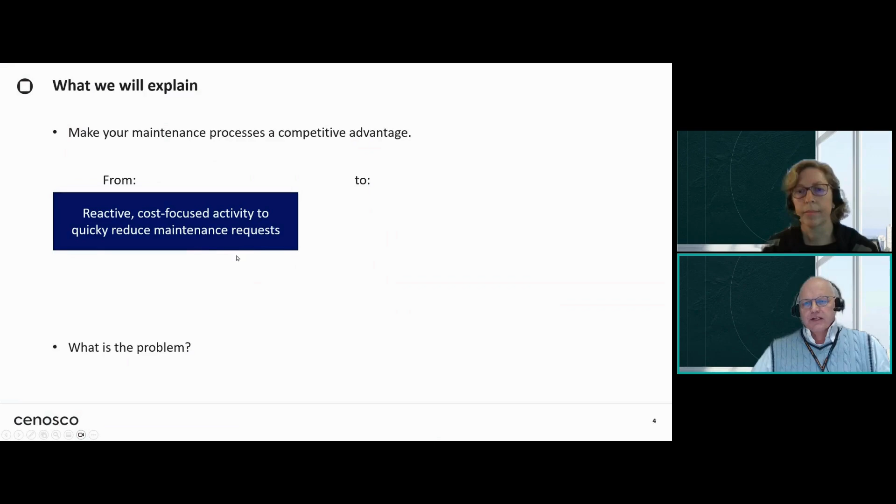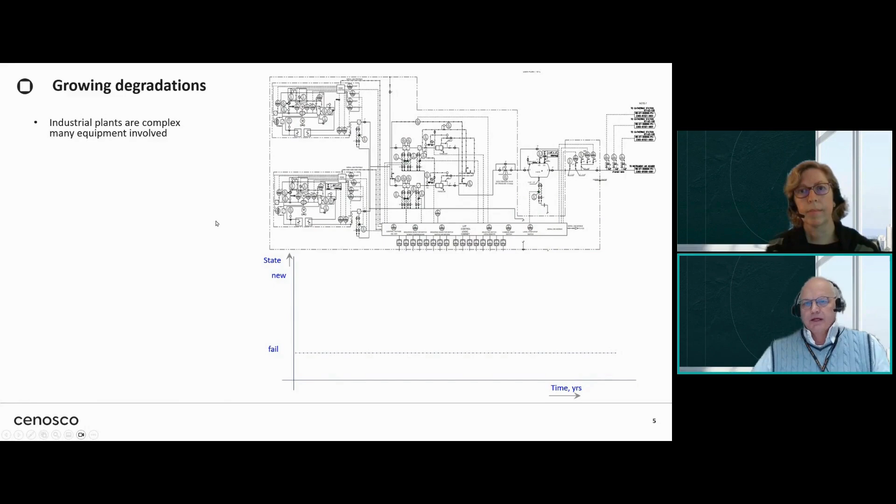So the question is, how to move from, say, a reactive cost-focused activity for maintenance more into a proactive value-adding activity, and how to do that. What is actually the problem here? The problem is often if we build a plant, then in first instance, we're just interested to make product. And so we have typically a maintenance and operational department. But these installations can be quite complex, and there's a lot of equipment involved. And this equipment starts to degrade from the start.

And some degradations go typically slowly and maybe linear in time, but some go non-linear in time, some go faster, some go typically in an undulating way where, dependent on the operational conditions, sometimes the degradation goes a bit faster and then slower, etc. So now the question is, with all this equipment degrading and all these maintenance requests popping up, how to deal with this? Because after some time we see that the maintenance department can get overworked and typically operations is unhappy. How to deal with that?

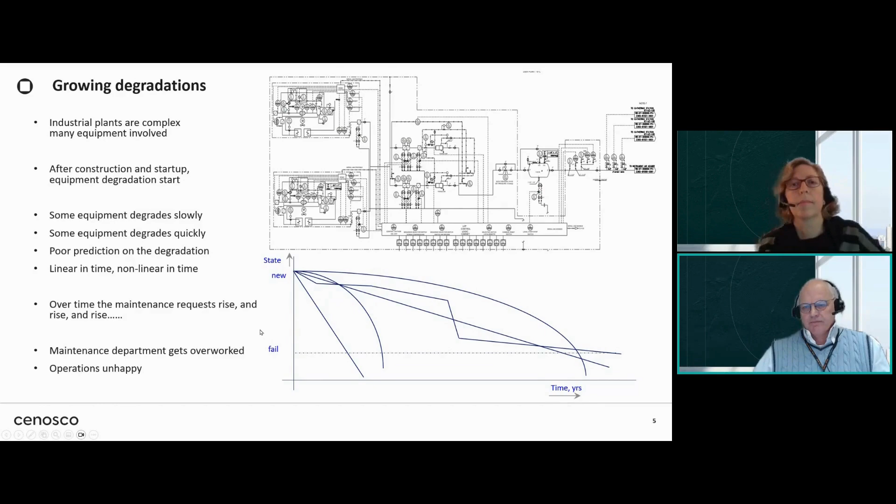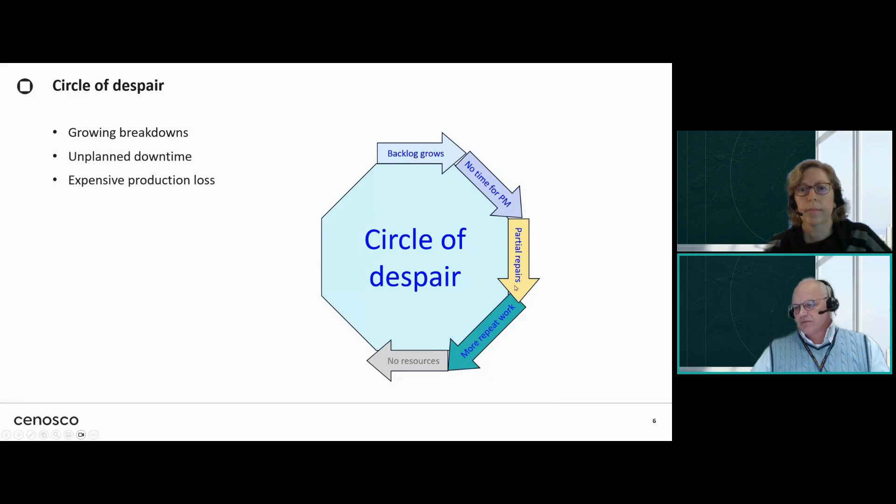Yeah, we call this sometimes also the circle of despair. And in this circle of despair, we see that the backlog is growing. We have no time for preventive maintenance. We see we have partial repairs. We get more repeat work. We do selective repairs. We get budget cuts, and the morale drops. So how to deal with that and how to step out of this? You can wonder, in this logic, who's active in reliability, who owns reliability, and who's actually managing the reliability.

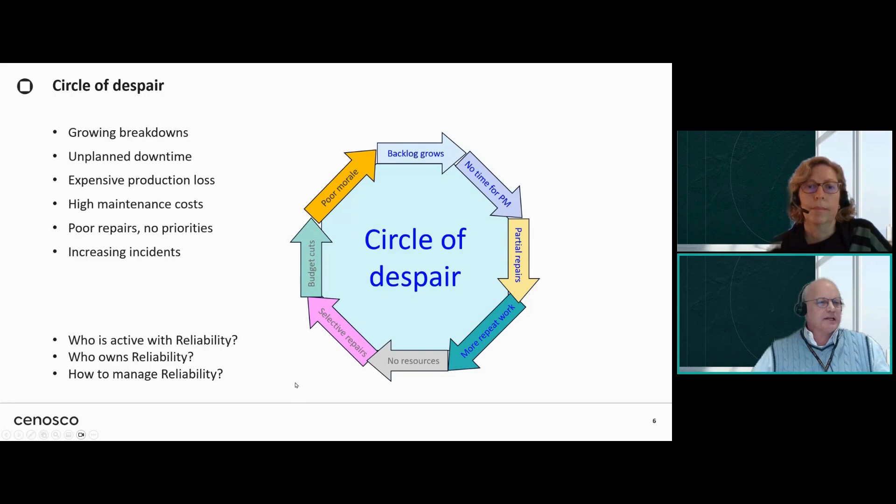Here's an overview of some maintenance history for 4 years. We did this analysis and made this more or less Pareto diagram, and there was one piece of equipment that actually had 80 failures over the 4 years.

I show you this graph because this helps to get a bit of focus. Where should you start? You may start, of course, with which equipment has high priority repairs and multiple repairs over time. And you may realize from this graph you should focus on this end and not on this end. So if you focus on this end, you will start to bring a bit of peace in your operations. You expect that certain breakdowns will not occur anymore, or maybe later, and you start to get a bit of grip and power over your degradations.

One of the reasons I show this graph is that, if your program of reliability improvement is effective, after some time you may have addressed this peak here, and then you need to address the next one for the next year. So after a few years, if you do this maintenance history analysis again, you expect this to go down, and later on to go down even further. And this may help you to focus on the high priorities and the repeat repairs to free up some resources and to improve your reliability.

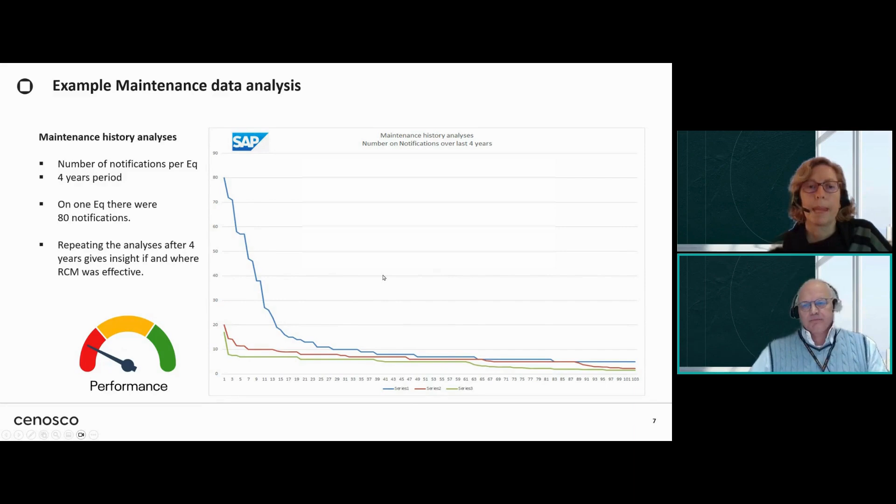So you may wonder, how does this connect to RCM? In RCM, we are interested in what caused the equipment to fail. What are actually the ways it can fail? We call that failure modes. And when we know these failure modes, what can we do to prevent or predict the degradation, take action, and actually get our performance up?

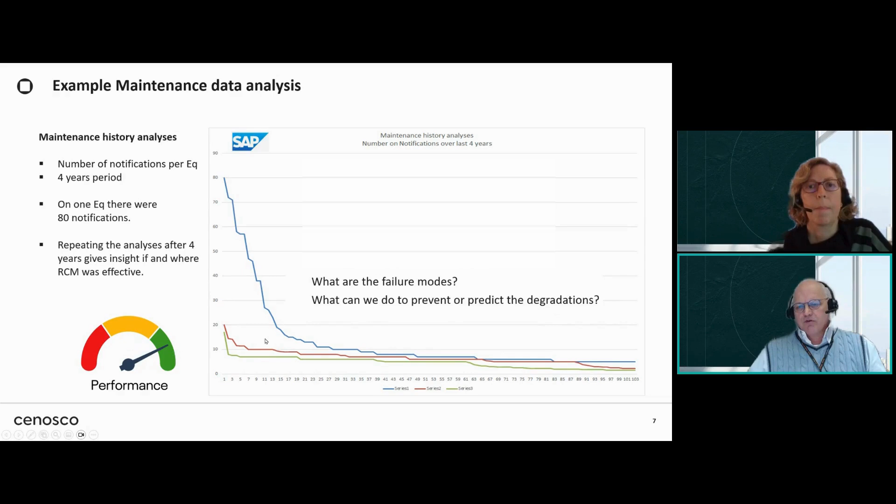A part of the maintenance of that installation is managed under what we call asset management. And in asset management, we can describe a few processes. This can be very detailed, so here I just want to keep it simple. The main objectives of our asset management are that we want to reduce our business risk, we want to increase our revenues, make more money, but at the same time, we want to reduce our cost. And then we're interested in how to balance these three and come to a balanced approach.

So in asset management, we typically start off with what we call the executing processes to maintain the plant, which is typically in the area of maintenance execution and turnaround. And there's often a managerial process to oversee that, to have a look at risk and to intervene there. On the turnaround and maintenance execution process, we also see that SAP is involved to hold those objects in, for instance, notifications and work orders. Then we can measure our performance, but if our performance is poor, our manager gets angry. And from the angry manager, we actually end up in what we call analyzing processes.

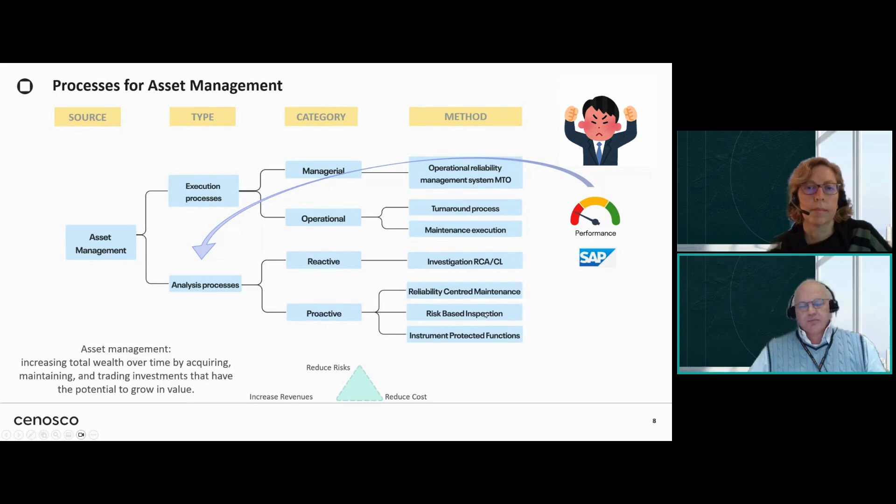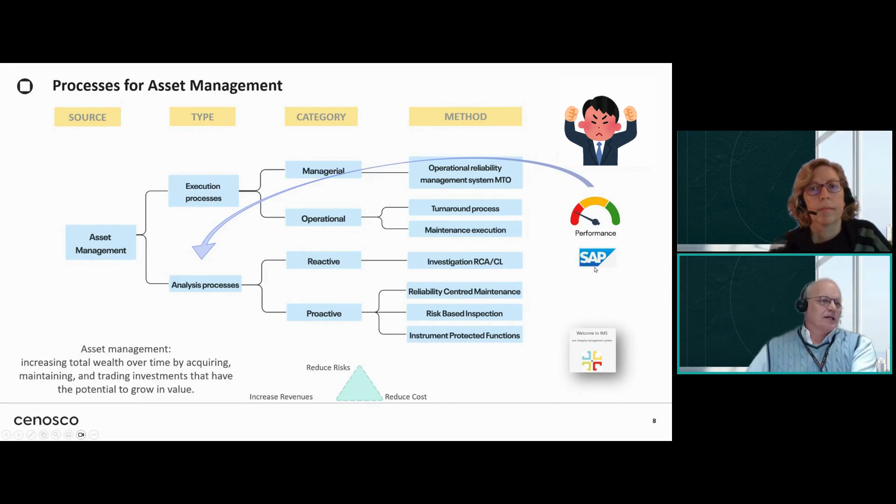The analyzing processes can be done in a reactive way: something went wrong, what to do with it, and we do an investigation, sometimes called root cause analysis or nowadays causal learning. But it can also be done in a proactive way to take action before the next failures come. And here we see that the processes of reliability-centered maintenance, risk-based inspection, or instrument protected functions come in. RCM is related to reliability, risk-based inspection to integrity of mechanical equipment, and instrument protected functions to safeguarding instrument systems. And here we see that the tool that we own, the IMS tool, holds this area. So this picture also gives a bit of an idea of what is taken care of in SAP and what should be taken care of in IMS.

If you think of what kind of functions can go wrong, then we have a list here of the typical functional aspects of a plant. One of the things you might want to start with is: what is the production reference plan? What are my targets? Do I meet my targets? And do I measure my performance against the target? One of the first things you should do is make sure you measure your performance. And from that performance, you should see what your gap is. From here, we can check out license to operate aspects, how to deal with product storage capacity, do we have storage there, how to maintain that, and know the phases in the production process.

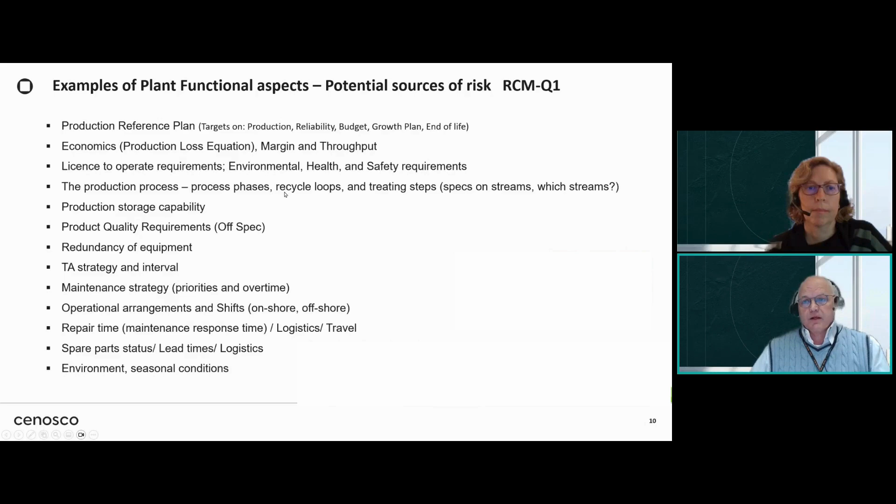Why do we do that? Well, we typically follow in RCM the 7 questions of RCM. These 7 questions seem simple and rigid on one side, but they are actually a very good guide to what we're looking for. Often we see in maintenance that we may overlook the first two questions: What are the functions and performance standards of the asset or the unit? In what way can it fail to fulfill those functions? And actually, these first two are an indication of where our risks are and how to deal with those risks.

From there, the RCM questions help us to say what can cause those failures. But one of the most important questions in RCM is question 4: what happens when each failure occurs? And this is actually a question where you are forced to understand how your equipment degrades and how it may fail and what is the failed state.

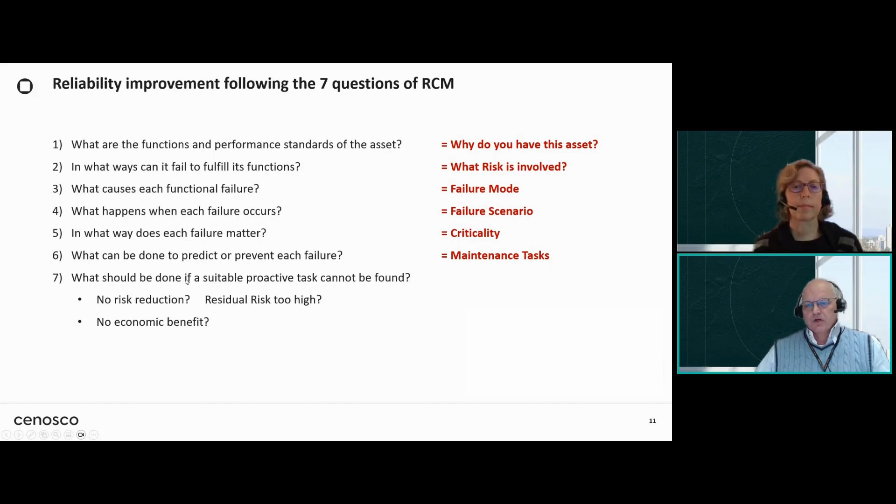And from there, you can then say, hey, what can we do to keep that in good shape? And if you do those tasks, is there enough risk reduction? Is there economic benefit with the task we have? And if there's not enough risk reduction or economic benefit, what can we do to get an alternative there?

If we look at the cost effectiveness of maintenance, we see that if we do more maintenance, then we actually spend more money, and we expect, of course, that the cost of non-availability goes down. And then we end up in an area that we call risk-based, where we look for an optimum. If we don't do enough maintenance, we are under-maintained, and if we do too much maintenance, we are over-maintained.

But you can wonder, what is a risk-based approach? Well, the point of a risk-based approach is actually that you want to make an estimate of the risk if you do nothing, and the amount of risk if you do nothing is actually a measure of how much resource you have to do something.

So if you look at the risk-based approach, you actually see that we compare two situations. First, we do no maintenance and then check what is the risk level. Then we do the maintenance activity, and then we're interested, is there any residual risk? So if there's high risk, we do high maintenance. If there's low risk, we do low maintenance.

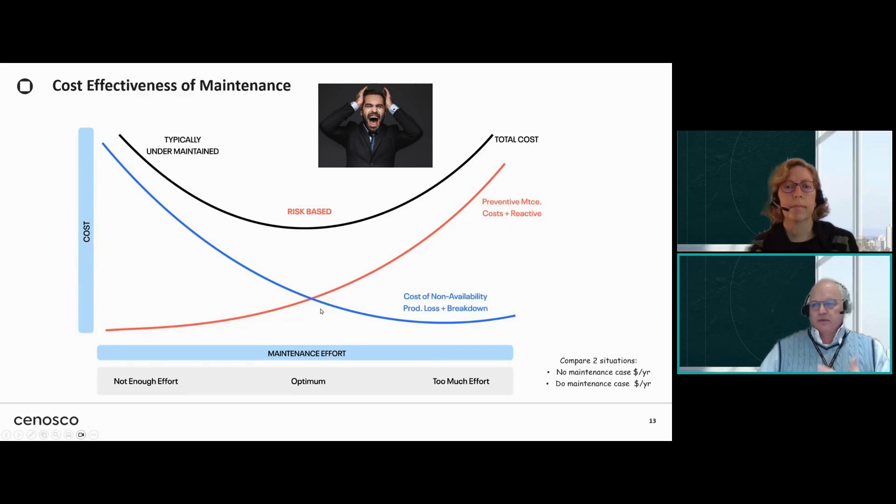If we look at failure modes, actually a failure mode is a way in which an equipment can fail. And we follow the failure modes according to the definition of Mr. John Moubray. And John Moubray, who wrote a very interesting book on RCM, said actually a failure mode is a concatenation of two words, an item and a failure description, or a noun and a verb.

For example, if you look at bearing failure, is that a good failure mode? Well, it's a good item, the bearing, you can hold it, but failure is a bit vague. Actually, you could say, hey, I would like to look at how can a bearing degrade? And you could ask, what's the function of the bearing? Well, it's to keep the shaft in place, but also allow a low friction rotational movement.

So from there, what can go wrong? Well, you can get clearance on your bearing and you don't keep the shaft in place. So you get bearing wear. But the bearing wear can be driven if the lubrication is not good enough. So this can be driven by what we call lubrication failure.

So if we take an example of a simple centrifugal overhung pump with two bearings here, we can wonder, in this situation, how would bearing failure be driven? Well, this could be by low oil level. And now, if we look at these aspects, bearing wear and low oil level, we can actually wonder, how can we determine that this is occurring? And this comes back to question 4 of RCM. What happens when the failure occurs?

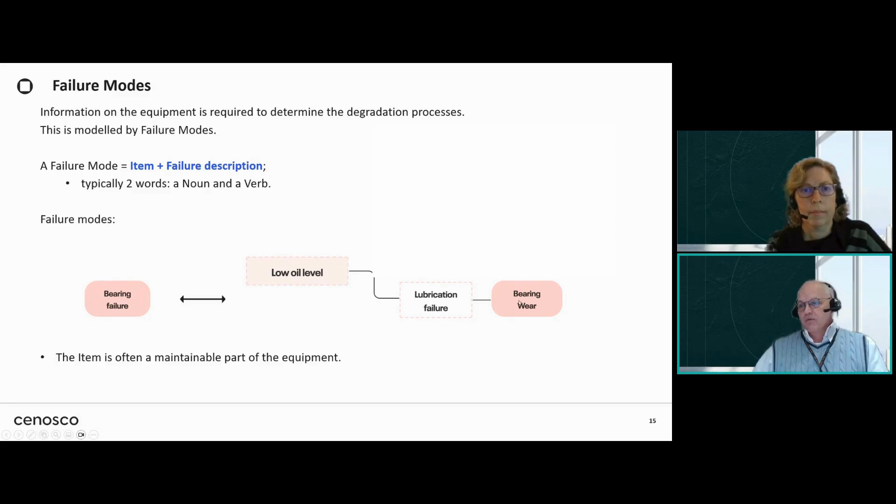So here, how would we determine bearing wear? Well, we got too much clearance and we may get vibration. Low oil level, how can we detect that? Well, we might have a sight glass and we can look at it. So what I'm trying to do is I'm trying to look at these aspects and how can we connect it to a technical argument.

But it also can have oil degradation. Well, what is degraded oil? Well, it may not look like apple juice anymore, but something like this. This is typically old oil, not so good. Of course, there can also be particles in it or water, but actually it is losing its lubricating.

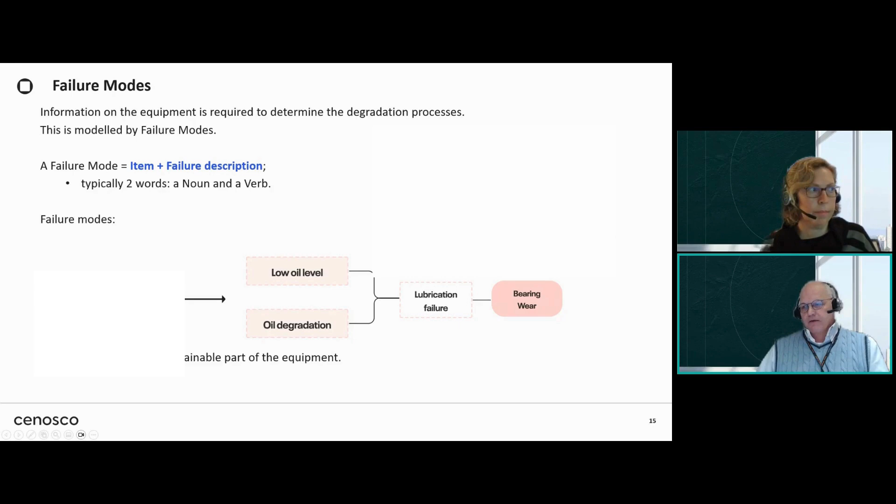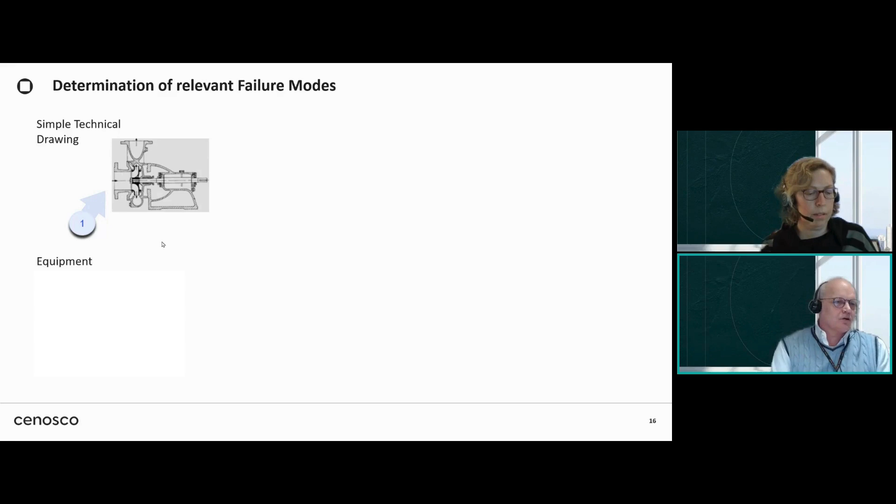Then you can wonder, if I have a piece of equipment, which failure modes can occur here? How to determine the failure modes? Well, if you want to determine the failure modes of a piece of equipment, I would recommend you first take a look at the picture of the equipment. What does it look like? Take a look at a cross-sectional drawing. What is internally there? What are wearable parts? What are parts that can corrode, erode, maybe foul up, etc.?

And from there, you can wonder, do I have some maintenance history on this, or do I have a maintenance manual? In the maintenance manual, there's often a list of spare parts that are recommended, and this is what we call a recommended spare part list. And you can see it coming that a failure mode, which is a part with a failure descriptor, may be listed in the recommended spare part list of the vendor.

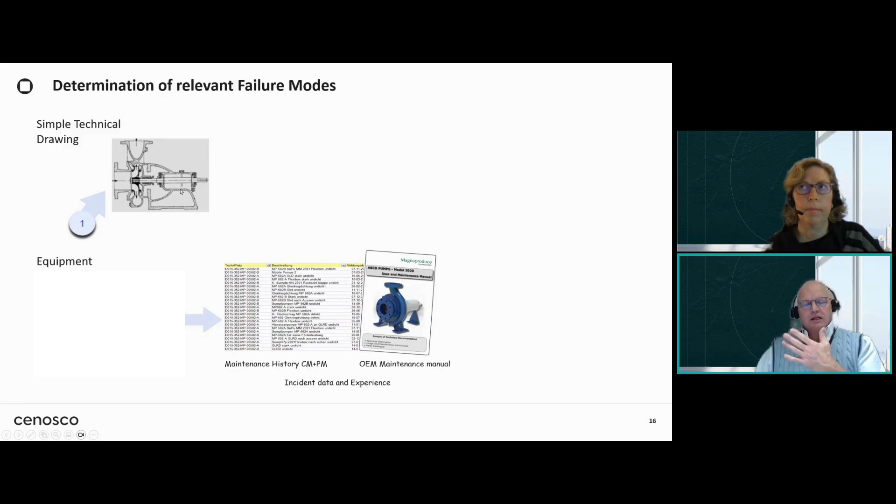So the recommended spare part list of a vendor can help you to say, what of these spare parts may degrade? What do I expect? What is the consumption? And from there, what may be the failure modes that can occur on my equipment? And based on the buildup and those degradations and failure modes, you can wonder, how would that then lead to a failure of the equipment?

And there you should look in the P&ID and check out where the pump is in the P&ID. In this situation, you see there's an A and a B pump. And this also helps to say, what are the products that go through that pump? What are the temperatures and maybe the composition of that product? But also what will happen if the equipment fails, and which failure modes are more important and less important.

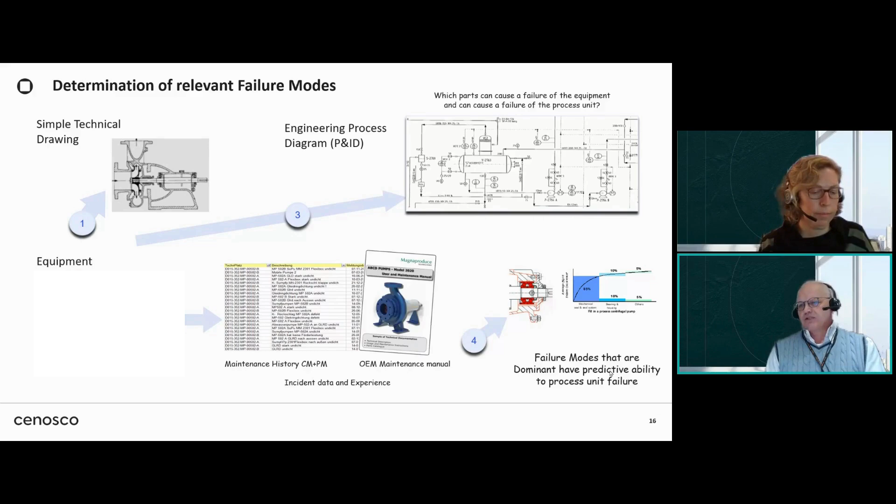And from here, we can make a list of the failure modes. And we may say, let's focus on the dominant failure modes. These are the failure modes that most regularly occur. And what maintenance can we do to avoid those dominant failure modes?

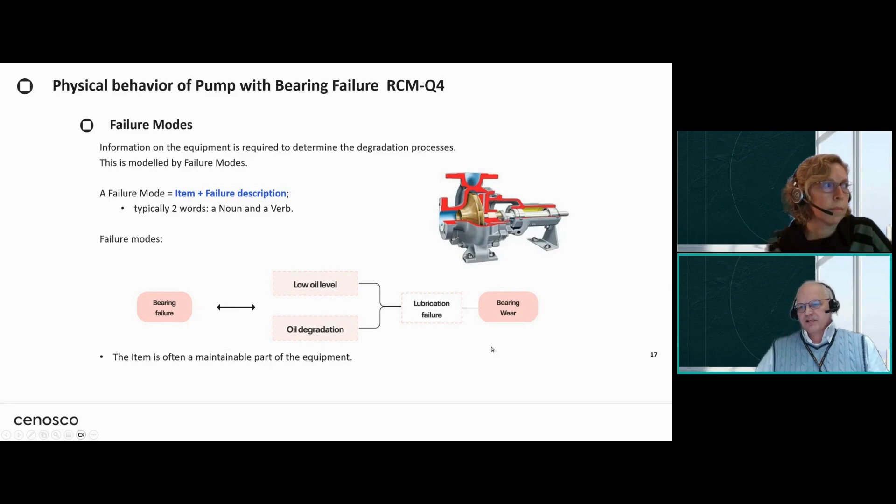If we then go back to this overview of these failure modes, we may wonder, if we look at question 4 of RCM, can you describe what happens when the failure occurs? How would this come together if we look at these 3 aspects? So we may draw a line where we see a minimum acceptable condition, we see the performance of the equipment, and we may get low oil level. If we get low oil level, then very quickly the bearings run out and the equipment stops. So if we take care of the oil level, that is already better.

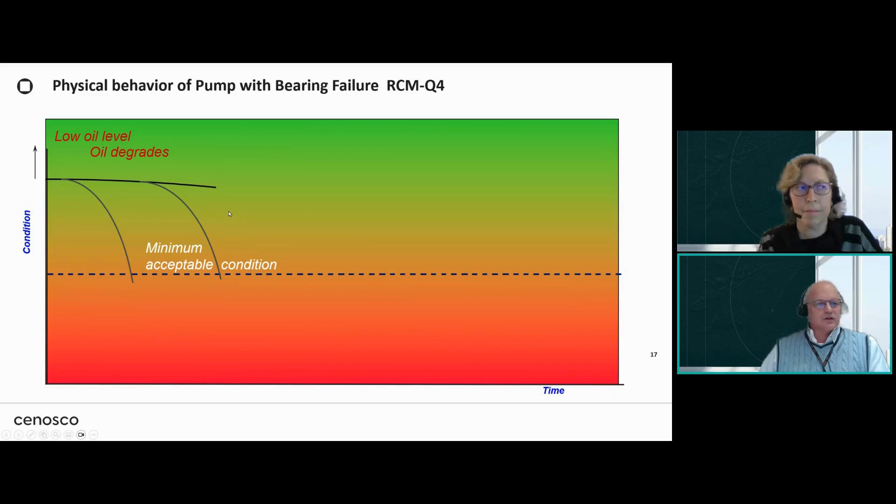If we then do nothing on that oil anymore, the oil may degrade because of condensation, degradation, or other issues, and that can cause an accelerated degradation of the bearings. So if you keep them well lubricated and running nicely, then we may get the normal bearing wear that is anticipated in the design. This may cause at a certain moment that the vibration goes up. Gradually the bearing loses its low friction ability to keep the shaft in place. We get more noise, the bearing gets hot, starts to absorb more energy, and in the end the electric motor may stop on overpower.

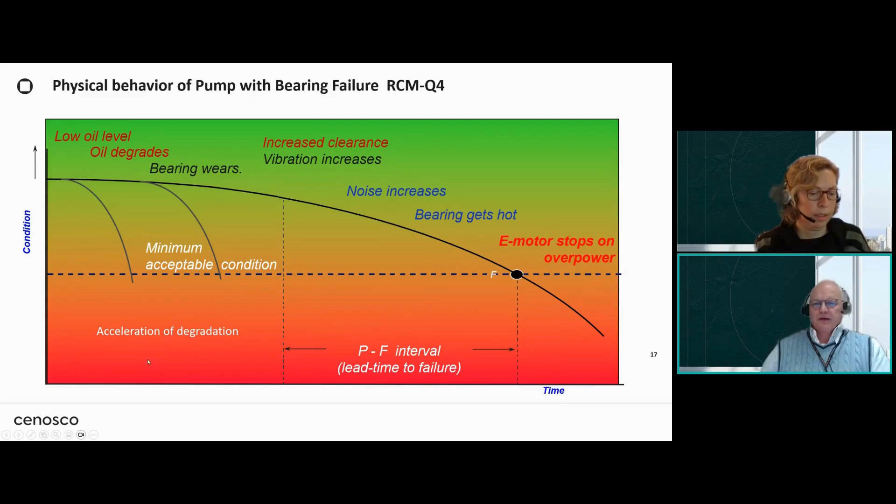So why do we put this in a graph? Well, this graph may help us in question 4 of RCM. In what way may it degrade and how would this tie together? And here you can have a number of points where you can detect what's going wrong. Next to this, you can then put tasks on these P points.

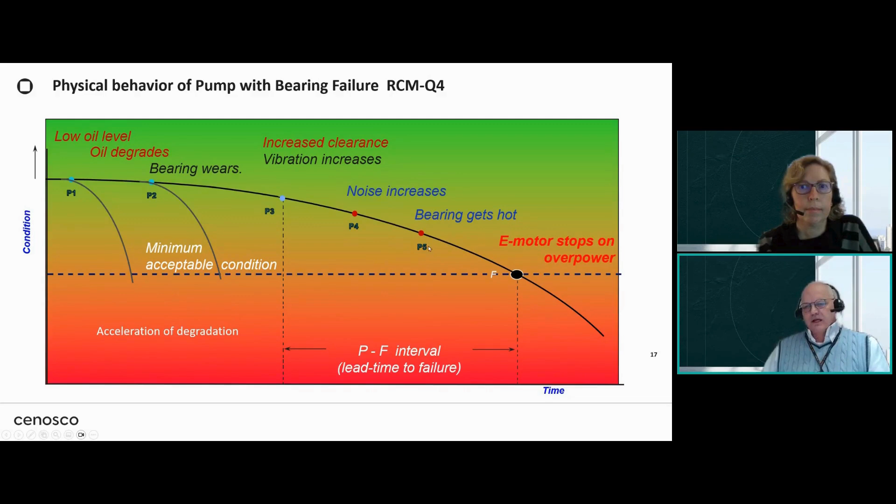So we can say, I need to check the oil level. Here I need to replace the oil. Here I need regular vibration monitoring. Here I need to do an operator check around. Does he hear anything strange? Maybe measure the bearing temperature once a day, and from there I am sure that my pump is in good health.

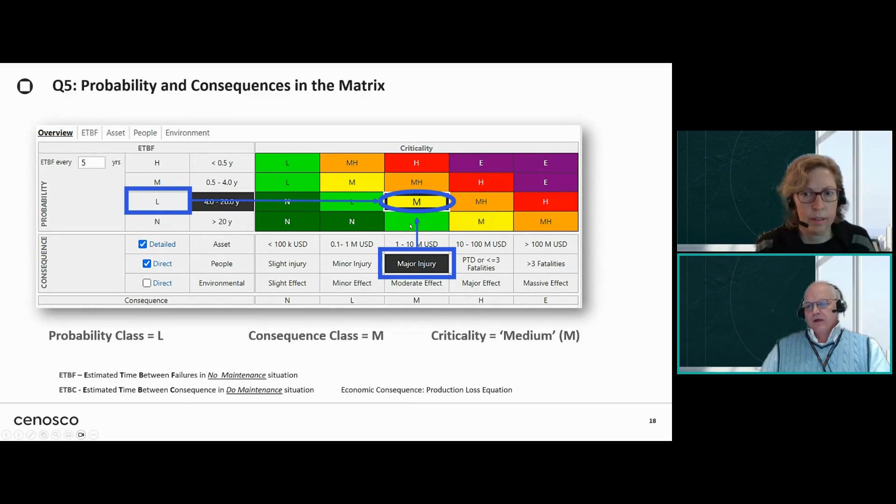So from here we can make an estimate of what the risk will be if we do nothing, and this is built up in a probability and a consequence. And on the consequence side, we can look at the asset aspects, the people aspects, and the environmental aspects. And this gives us an indication of the criticality if we do nothing. And as I said, in a risk-based approach, if we do nothing and we have a certain criticality, if the criticality is higher, we can do more maintenance. But if the criticality is lower, we may not have enough funds to do maintenance.

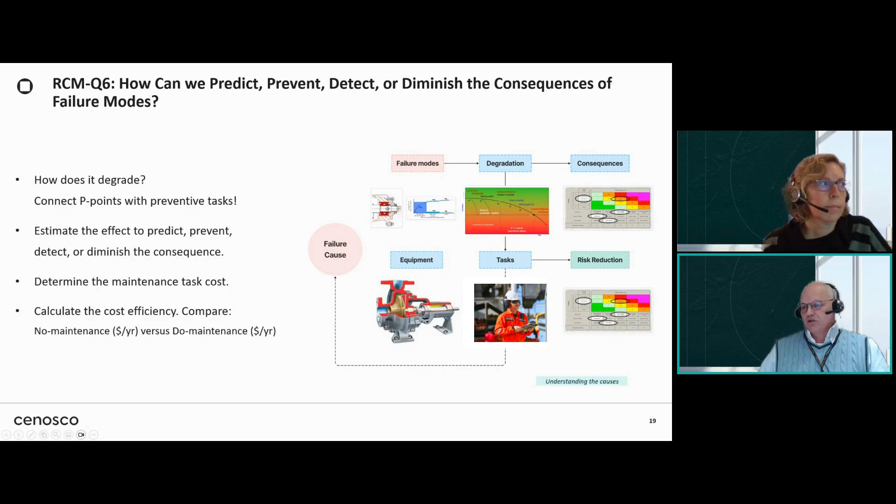Here's an overview of how we can then take action. Well, we may take our degradation graph and look at the description of how this degrades, and then from there determine the tasks and make an estimate of what the risk reduction will be.

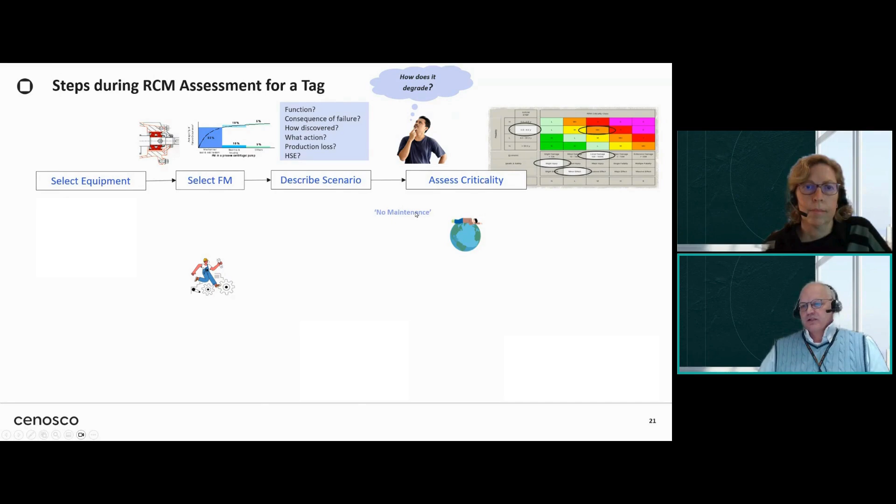Here's an overview of how this then would go. So over the various equipment, we first have a no maintenance scenario. Next, we have the do maintenance scenario. We come forward with the tasks, and from there we decide if this is good enough.

You can say, hey, this is quite some work to do this failure mode by failure mode. So you can wonder, should we go through these 7 questions always, and actually do these analyses one by one for all these failure modes? Well, I personally would say it would be good to regularly do an RCM study and keep your RCM knowledge and competence and capability in place.

But there might be reasons why an RCM study may not be that effective for you to justify all that work. So here I have a few arguments why an RCM study may not be as effective as you expect. For instance, if your maintenance history is not accurate enough, it may cover a short period of time, or it may not be applicable for the unit that you have.

Next, you may have a situation where your experience and your knowledge of the plant and the degradation is not strong. It could be due to turnover of your crafts and your specialists, or it may be that the unit is just rather new. Or maybe you have a new maintenance contractor in place, who is quite new to this and has no clue how this worked in the past.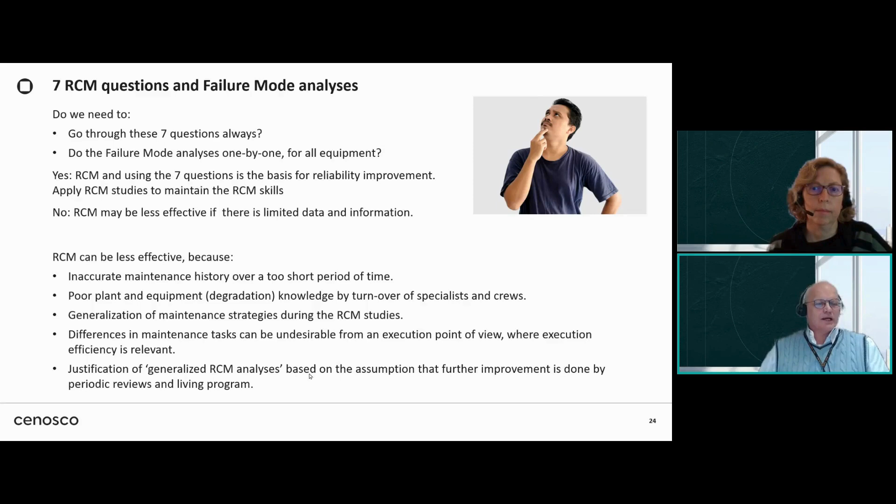So these can be arguments to say, hey, we can justify a more generalized RCM analysis, but at the same time, you would be wise to use the 7 questions of RCM to verify how good these templated RCM analyses are, because in the end, we're cutting corners, and we are skipping a few of those aspects.

So here's an example of what we can do in our tool, and we call this a maintenance library. Here you see that a maintenance library is shown based on some object types. And here you see a number of failure modes that are applied in this maintenance library.

So after you have decided for which equipment you want to do a detailed RCM study, then you can make a decision: for which equipment am I interested in a maintenance library? Can we check if there are common equipment types, and for those, which templates can we create?

Here it's a simple example. You could think of centrifugal pumps, other similar rotary equipment, heat exchangers, control valves, batteries, low voltage motors, and instruments. You would be wise to involve your discipline experts to say, hey, we want to standardize this.

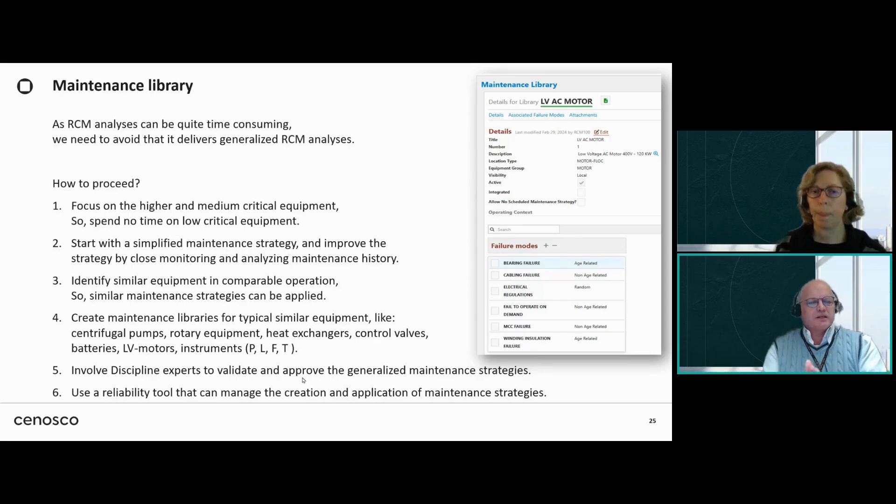And maybe your discipline experts already have some templates that they use. You can say, hey, maybe you can use the templates that you use for the maintenance of our equipment, and we can put them in a maintenance library and apply them more easily to multiple equipment.

How to create such a maintenance library? Well, if you say, let's create a maintenance library for some valves, here I just put some valves together. You can wonder, can we do this in one maintenance library? I think you quickly realize that this is a ball valve with a big actuator, this is a solenoid, this is a motor operated valve, this is a TSO valve, this is a Masoneilan and a butterfly valve. They are quite different. They don't even look the same.

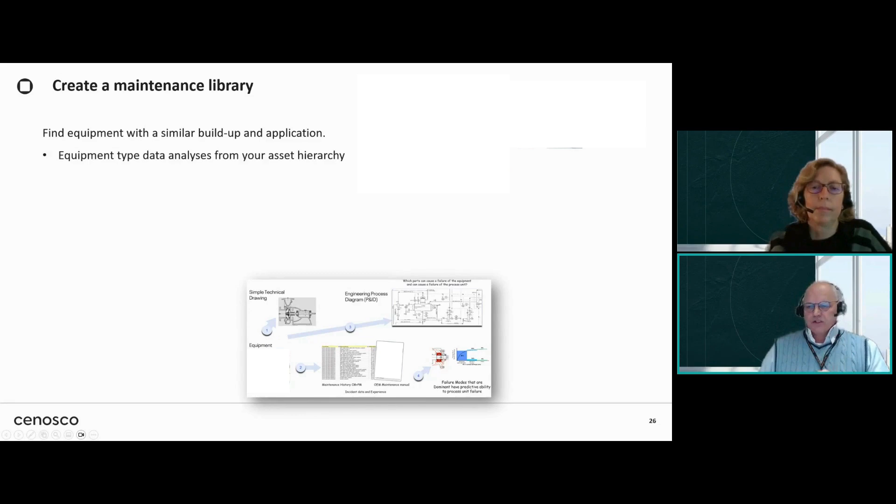So my advice is, if you follow these steps here that we promote to identify the failure modes, you already see from the pictures and from the build-up where you have commonalities and where you can create an RSL for one group of these and where you need to create another one for the others. So always take a look at your own equipment if you create a maintenance library.

From there, you can use the 7 questions of RCM. And here I have an example for a globe control valve, some of the failure modes where you may want to take action on in a template.

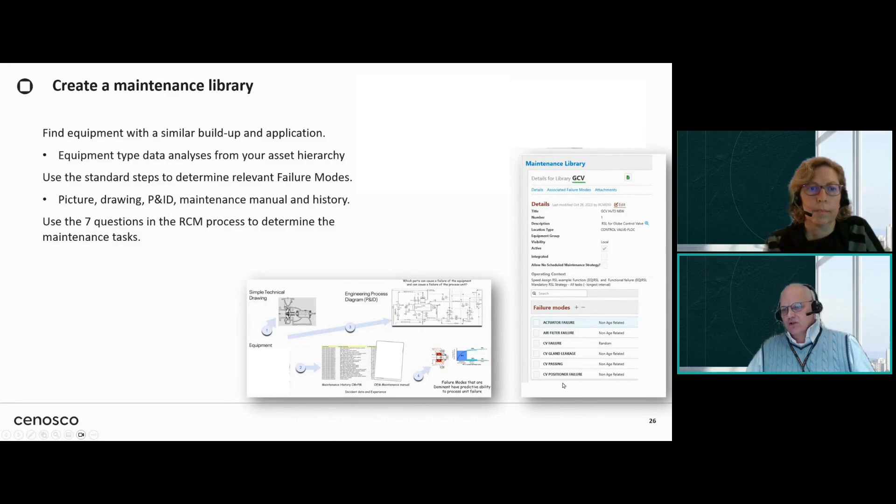In the tool we have a number of clients, and these clients are also active in producing maintenance libraries. And here's an example of what we call the global RSLs, the global reliability strategy libraries. You see here in our tool under the maintenance library tab that there are 306 global RSLs.

I cannot say they are all perfect and super good, but they might be good enough for you to say, hey, let's have a look. Maybe we can copy it over, split it up, apply it for our own equipment, and make use of that instead of identifying this from the start onwards and doing all the work ourselves. This might drive you to the question, do we need a tool?

We have worked with quite some clients, and some of these clients, and we understand that very well, may be a bit shy of an IT tool, and I can understand that. We have a few people who contacted us and said, we now do RCM in an Excel sheet, but it's not so easy, can you help us?

So here I have an example where you already see people try to set this up. They think 7 questions of RCM, I made 7 columns and I'm okay. But as this starts to grow, people realize it's getting bigger and bigger. Typically after 300 analyses, people say it's difficult to scale up, it's difficult to maintain, and it's even harder to report on this and to work on this, especially if you work with multiple people in an organization.

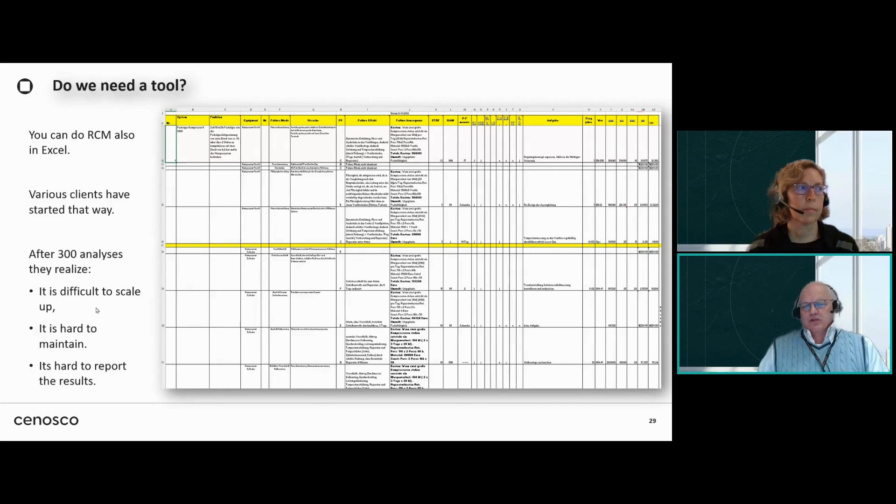Here's another example of such an Excel list, and that's the reason why I think you're wise to start using a tool. Here you see another screen from the tool. And why do I show you this screen? Because in this screen you see there are a number of what we call grids, and in each grid you see a table.

And we try to represent the information as illustratively as possible, so there's no direct need for much reporting. You can do a high level of reporting already from the available grids and from the data you already have. All this blue text here are actually object links, and if you click on it, you move to that piece of information. This is all maintained in the browser, so you can right click on it, say open in a new tab, look at the details, go back and make use of all the easy aspects of the browsers that we see today.

Also, you see here that there's connected information, like for instance how many failure modes there are, how many tasks, what the criticality is, etc. Another picture I'd like to show you is from the equipment grid. In this case, this client had more than 700,000 equipment. If you try to do this in Excel, there's maybe one person busy dealing with that Excel list full time. So here, I think the data is more easily available and easier to work with and maintain.

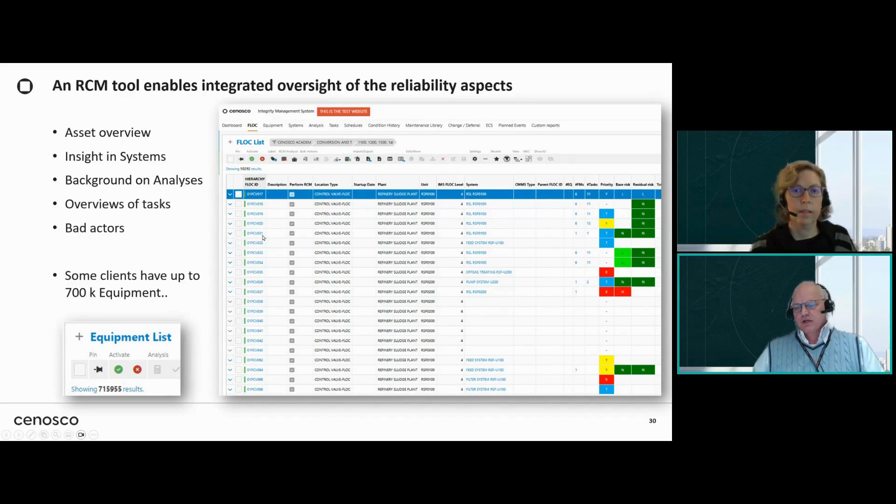One of the things is that we can create dashboards, and the dashboard can pull the data out of the tool. And here you see an example of an RCM quality dashboard where you see: what's the completeness of the analysis? What are the criticalities, residual risks? Are these analyses actually approved after they are completed? What is the economic class? And what is the ratio of the risk reduction in terms of probability? And this helps to say, do we have a clear argument on what the quality of our RCM study is?

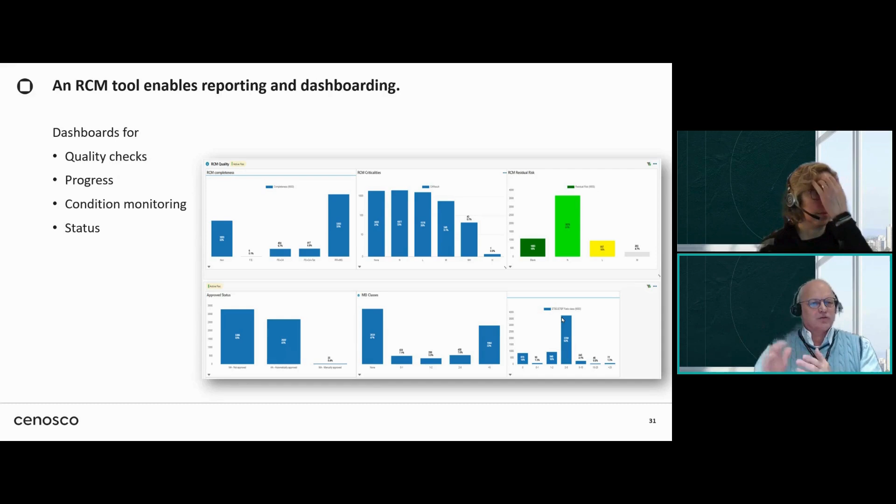And if we are in the position to put this in a dashboard, we can use this dashboard in our regular reports and show this dashboard to say, hey, we checked out a part in the tool, some data, we see there are areas with room for improvement, and we can then take an action, a tactic to improve that, and start an RCM analysis on that.

Some background on the hierarchy. So actually, as I showed you before, this tool is typically closely connected to SAP. So we take over the asset hierarchy in SAP, and the asset hierarchy in SAP is the master of that. So we can interface this where the data comes over from SAP to IMS, and the core structure is there: company, site, plant, the unit, and under the unit we can create our functional locations and equipment.

In RCM we can do RCM analysis both on FLOC level and on equipment level, and we're quite flexible there. And one of the first steps in an RCM study is actually what we call the failure mode and effect analysis. If we get failure modes, what is the effect of that failure mode? And we connect that to the first two questions of RCM. Okay, what's the function of my asset and where can it fail to fulfill those functions?

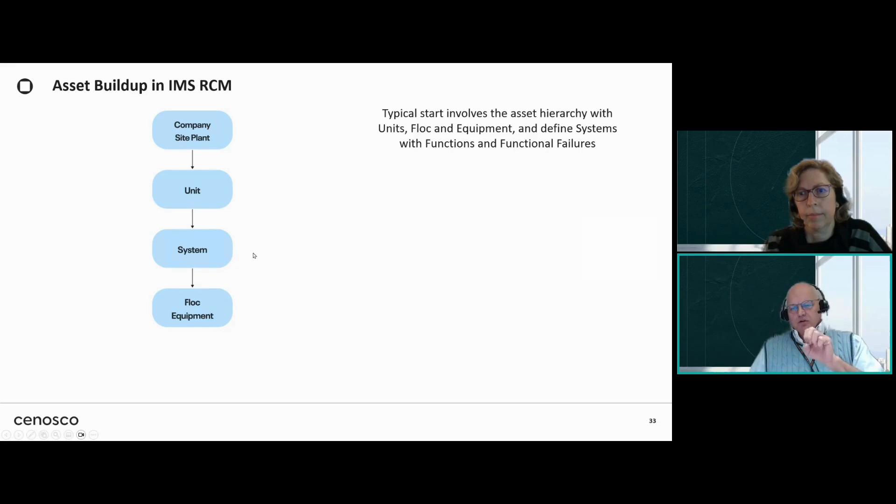And maybe if the unit is big, it's very hard to identify how a failure of equipment can cause a failure of that unit. So in the tool, we can split up a unit and actually create systems. At least we need to have one system, but it could be that in a unit we have multiple systems where we can also narrow down the functional failures, and that might be closely connected to the production process in that unit. So each typical unit operation of that production unit is in a particular system.

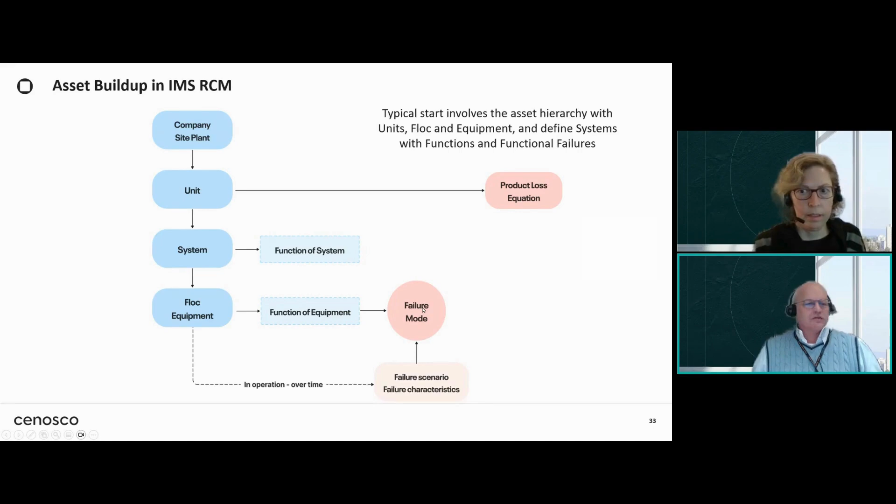So from the unit, we typically want to define what we call some economic data, and here we have an equation that says, if we have a number of hours downtime, what would that cost? We call that the product loss equation, and that is to bring in the economics if you look at downtime. So from the system we can have functions, and on the equipment we can have functions, and over time we get degradations, and that can cause a failure mode to occur, and that failure mode can cause a failure of the equipment. And now the question is, can a failure of the equipment cause a failure of the system, and how much would that cost?

So this is the structure that's in the tool. So why is it there in this way? Well, by doing it this way, we can actually be responsive to all the 7 questions of RCM and hold it in the tool, and at the same time have a practical approach.

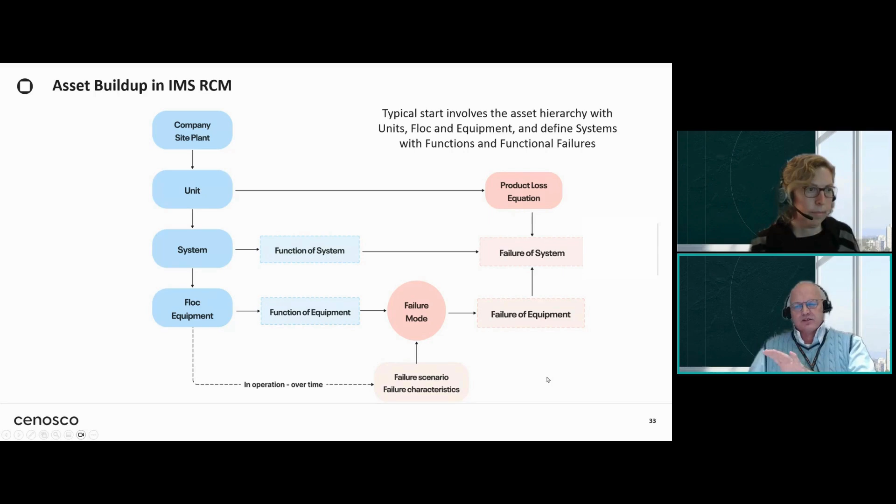Here's an example of a simple hydrogen desulfurization unit. In this case, we have here a reaction section, here a stripper section, and here a gas recycle section. And as we said earlier, what is the function of the plant, and where can it actually fail to fulfill that function? Of course, our first interest may be where can we fail to get the desulfurized product out? But also in these diagrams we have intermediate products, sour water.

We don't want to have hydrocarbons in the sour water. We get sour gas; we don't want to have too much water vapor in the sour gas. Here we have purge gas, which is clean, it's amine treated, so this is H2S-free gas. Here we get rich amine out, but we don't want to get hydrocarbons there. And here we get hydrogen-rich recycle gas, and we want efficient flow of that hydrogen gas. All these things that I just mentioned, you can argue are functional requirements, and that can raise the question, what failure on which equipment can cause functional failures there, and to which extent does it then matter?

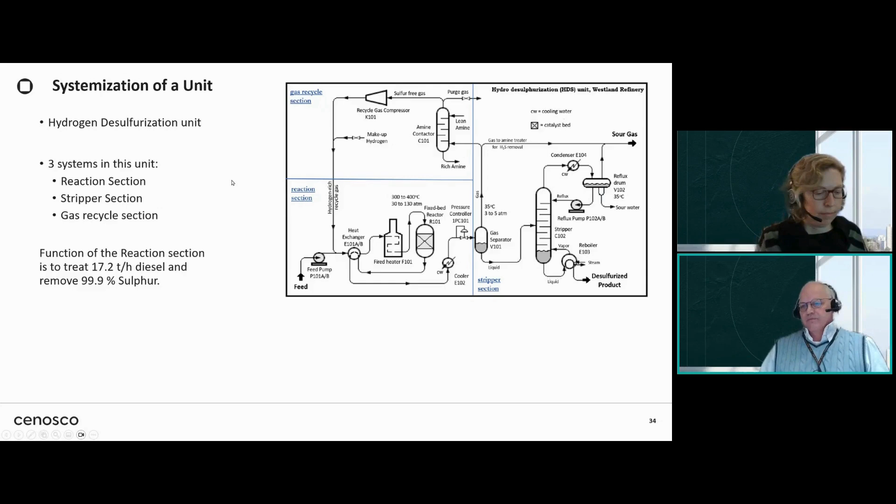So here we split it up in 3 systems, and for each system we can define what is the function, and from there what kind of functional failure may occur. In the tool here we have an overview of those systems, and per system we can get a bit of insight. How big is the system? How many FLOCs and equipment are there? How many failure modes are there? And what are the criticalities, etc.

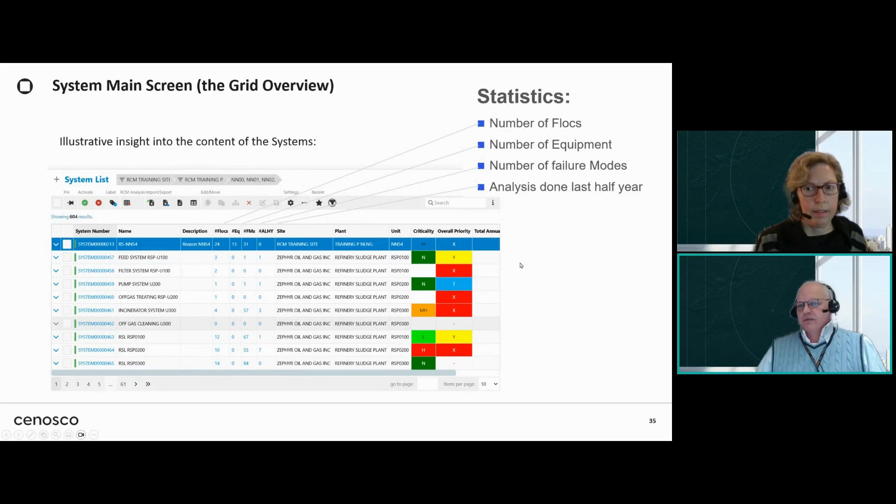So if we look at how to do an RCM study, I wanted to actually be very explicit on the steps. So here we see a few of the aspects that need to be defined up front. With typically, of course, site, plant, unit and the production loss equation, turnaround, and implementation system. This is where the tasks are held for execution.

From here, we can say, hey, we create our systems with the function and function failures defined, assign the Flocs and equipment to the systems, and then to prioritize that, to actually do a bit of a quick and dirty assessment. Okay, what are the more important equipment? What is the medium important equipment? And what is the equipment that we actually are not so much bothered with?

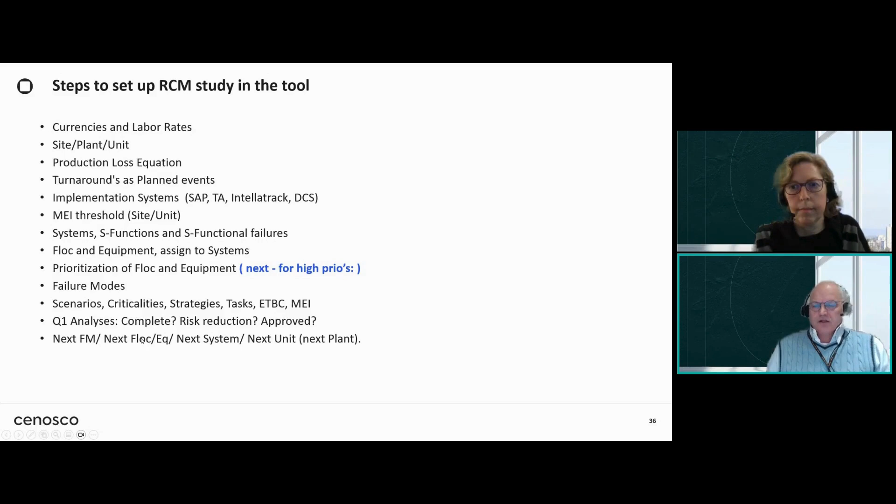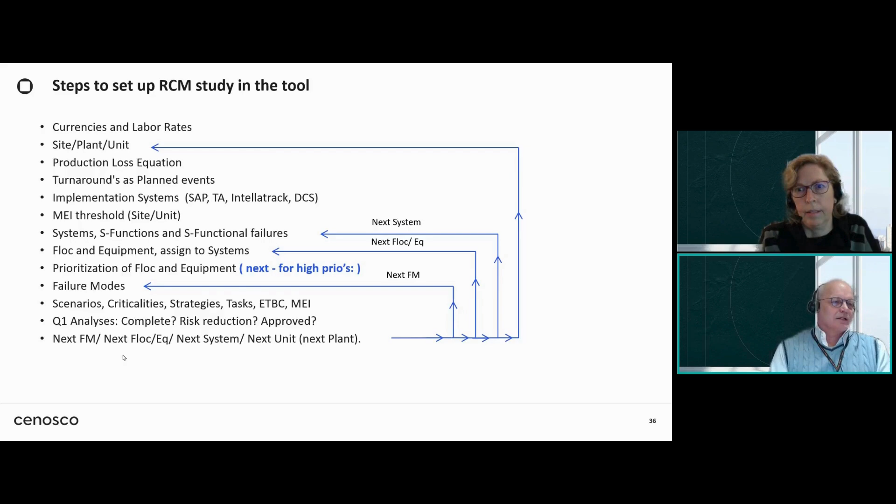So here, for the higher priorities, we go through the failure modes, put together the scenarios, criticality, strategies, tasks, and the economics. If this is complete, then we go to the next failure mode for that equipment or the next equipment, or if you had all the equipment in that system, to the next system or next unit, and even maybe to the next plant. So in this approach, we may have done all the RCM analysis for a certain particular plant or unit, and next we might then say, hey, now we want to assign maintenance libraries to that medium critical equipment.

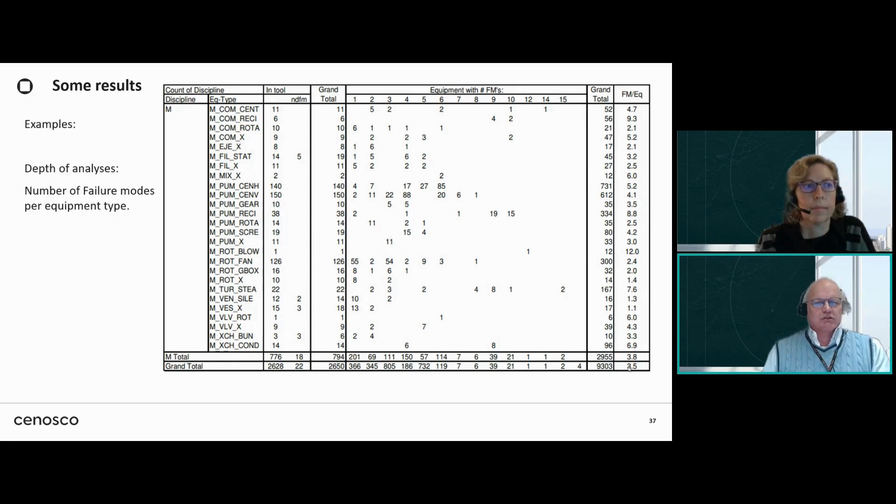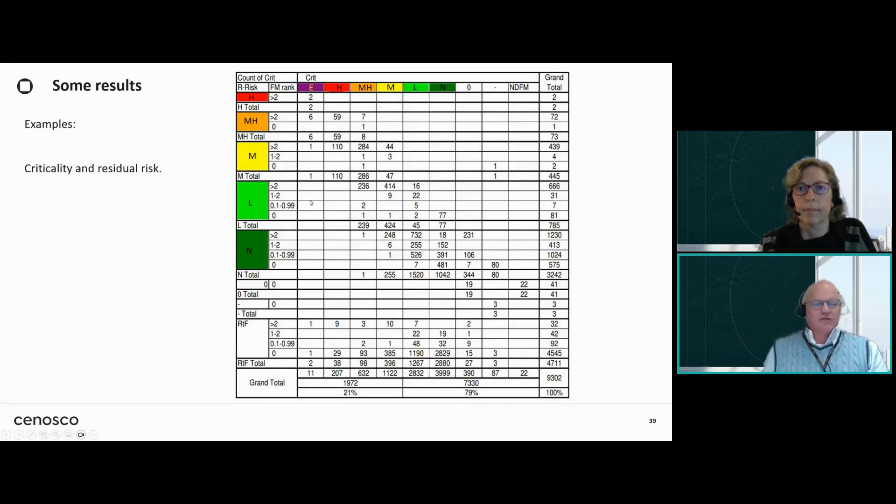But this can also help to say, hey, which areas am I interested in to verify? Personally, I'm always very critical on extreme and high criticalities. I want to see what are the scenarios. What are the expectations? On the other side, residual risk of level high or medium high is a bit too high. Did we do all our best to reduce this? Is this credible? Is it realistic? And you can actually say, hey, maybe we need to verify this to check the quality.

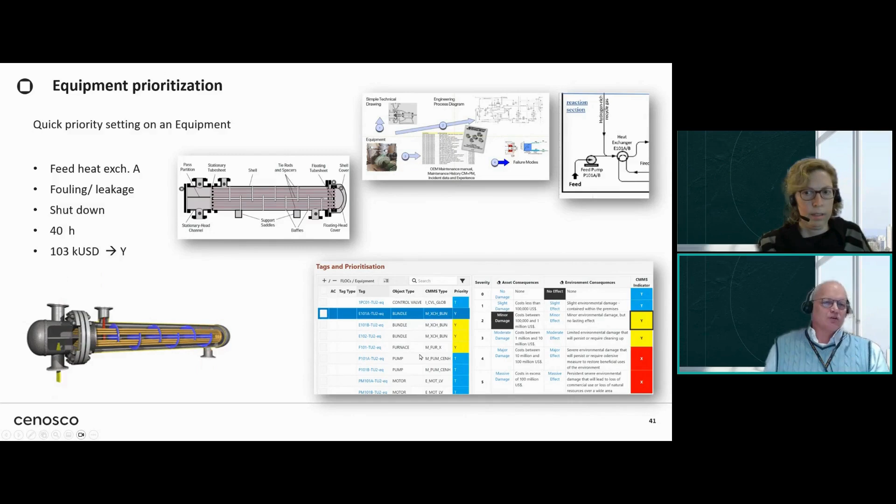To set priorities and to identify what are the more critical and less critical equipment, we actually can go through the various steps of the analysis. We need, of course, to know what's the buildup of the equipment. And in the tool, we can then say, hey, is this a higher priority, a medium priority, or low priority? And for the higher priority, we can say, hey, we'll do the RCM study. And if it's medium, we can apply a template.

Here, I show you how to add failure modes. In the tool, there's a whole set of failure modes available. And in this case, on the heat exchanger, we can have, say, fouling on the tube side and tube leakage, which are the dominant failure modes of a heat exchanger.

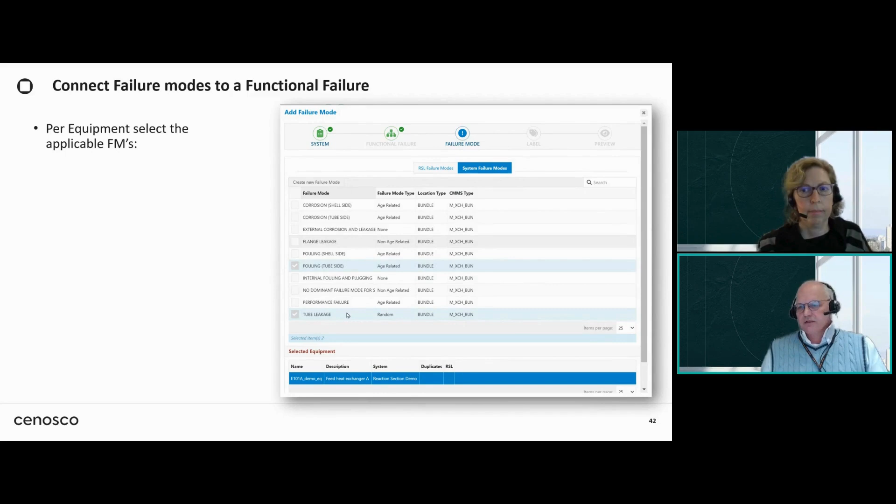How do we deal with the maintenance library in the tool? Well, first let's look at the steps involved. If we start off with the maintenance library, here the starting point is we already did the prioritization. So now we can look at which floc equipment by the object types do we have? Can we make an inventory for which we have enough installed base to make an RSL? And here we can decide, do we need to create an RSL or use a global RSL and actually localize that and apply that.

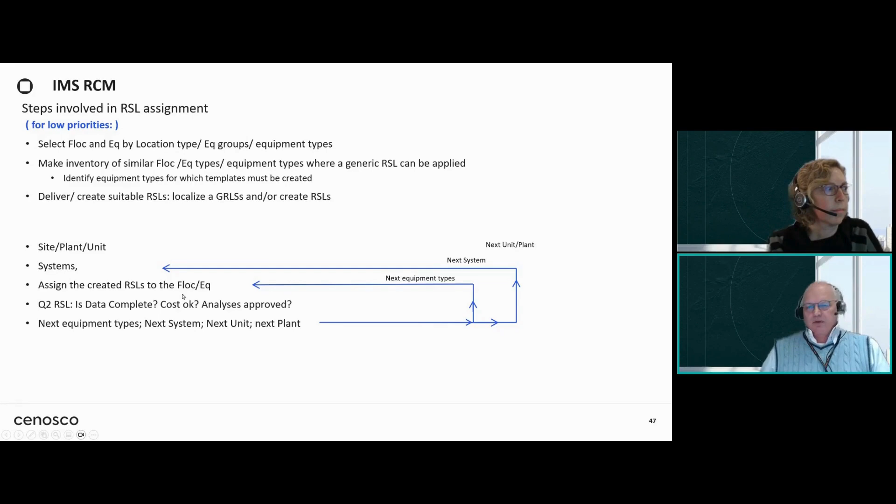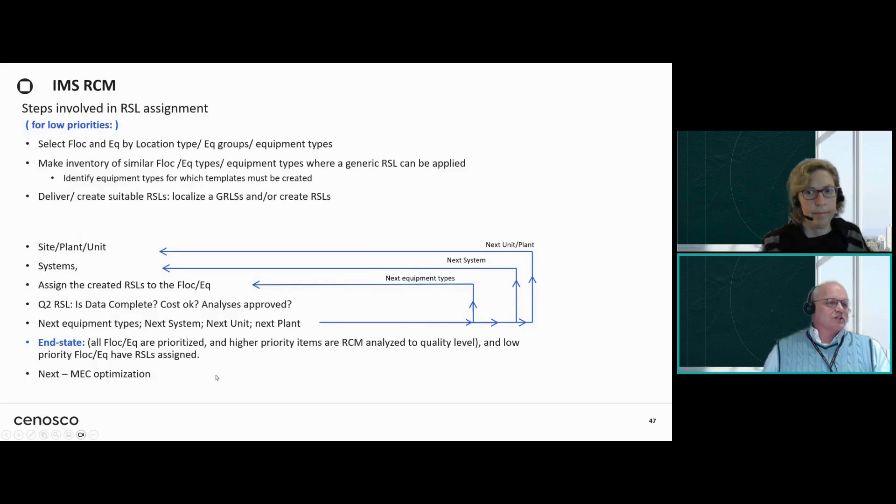So now if we have the RSLs there, then for each system, we can assign the RSLs to the various floc equipment for that equipment group. And if that's done, we then do it for the next group of equipment, the next systems, and next plant unit. And then we have an end state where all these RSLs are assigned next to the RCM studies that were done. And then we may go to a step called optimization to say, are now the tasks that we get out of this sufficiently aligned?

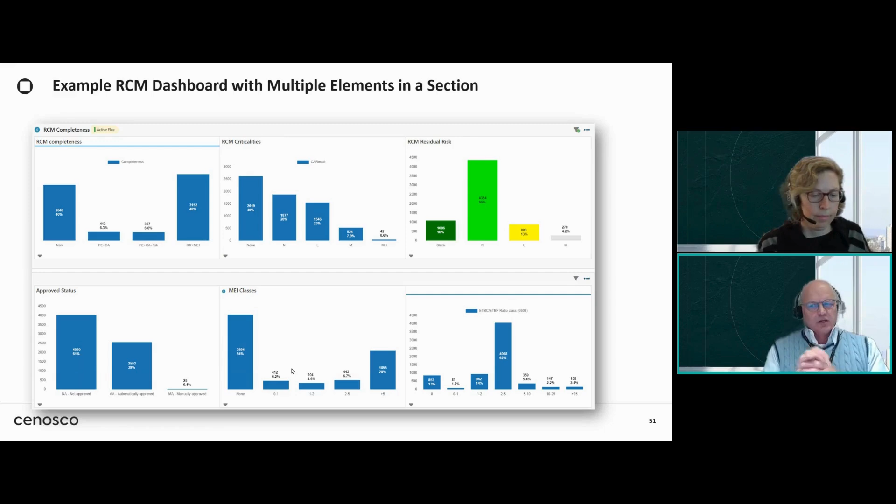On dashboards, I already showed you this dashboard, but I'd like to extend on it. In the tool, we can create multiple dashboards, and it would be good for you to think of, okay, what are the quality checks I want to do, and can I create a dashboard linked to my quality checks, so that I, in a systematic way, can assess what kind of work was done and how good that is.

Part of the IMS instance is a handbook, and in the handbook, you see here, there's quite some information available on the dashboards, and there are even for the RCM quality dashboards some details given, so you can use that to create your own dashboard, to modify your own dashboard, and to tune that to your own needs and interests.

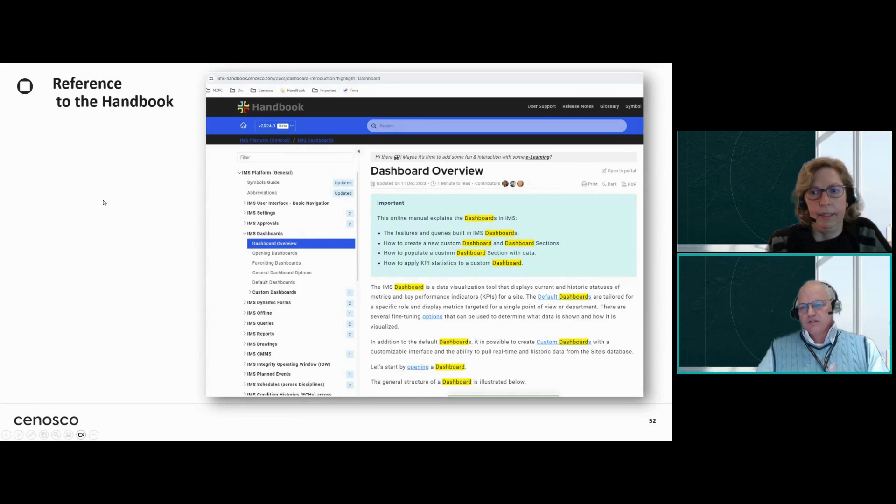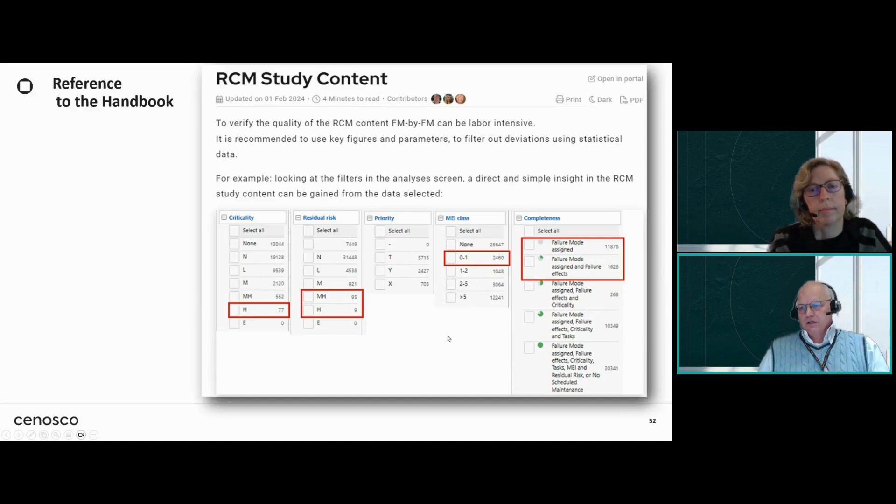Or I want to check all the incomplete analysis. Why are they incomplete? Should we do something there? So the quality checks can start off very basic, but can be put together further in a more total picture for the total quality.

After the tasks are created, we typically end up with the question how to execute these tasks. And one of the first things we need to answer: is there an interface between the SAP instance and IMS? Is there SAP, or is it Maximo or Passport or another tool? And is that interface applicable there? What are the elements there? Are the elements just reading from SAP, or is IMS allowed also to write to SAP? And of course you realize that there are also authorization levels involved, what you are allowed to do, etc.

Next step is, do we want to hold the task as a master in IMS and send over the task for execution, or do we want to master the task execution in SAP? So if you master task execution in SAP, you may create there PM plans and items with task lists, and then automatically work orders are generated to execute the work. So then the engine to create the work orders resides in SAP, and typically one needs then what we sometimes call a preventive planner to manage that.

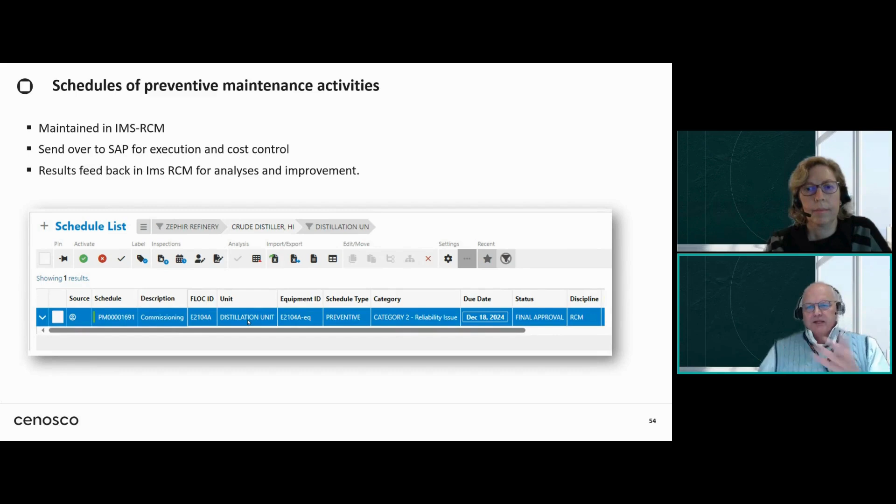But you can also hold and master the task on the IMS side and actually send it over to SAP. So here I have an example where there's a schedule, and this is a preventive schedule on this heat exchanger E2104. In this case, we have sent it over to do a commissioning on this heat exchanger, and this can be sent out to SAP, can be picked up as a notification, the work can be done, history can be written, and the history can be obtained back on the IMS side. So then you can completely own this from the IMS side.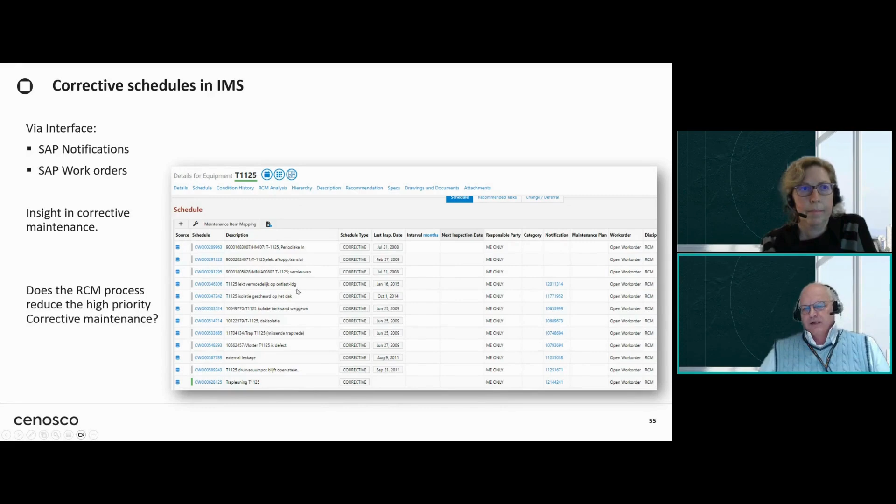We also have an application called IMS for fields using tablets. And in the field, you can fill in the data in the tablet, pick this up, send it back to IMS. And then in IMS, you can actually analyze the data and compare it to the data you have captured before.